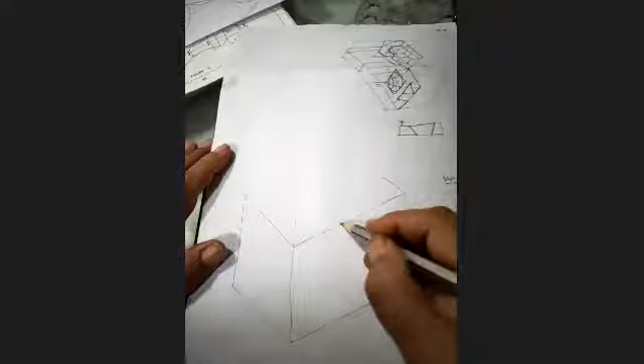Okay, now can you see from here, take 70, make a line. If the box is 30 degrees, right? All isobox are 30 degree. Origin, 30 degree.

This is 120. From here, measure 70, and this is the line. Same line will go up. See, this type we have done.

And here, the center part, the circular block - 20, 20. Circular block is only 20 wide. So just measure 20 and make it here. Is this part clear?

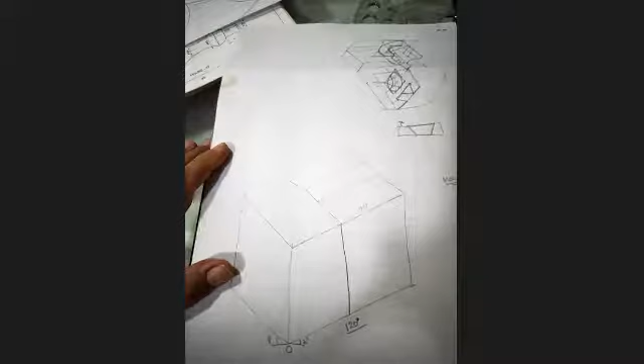And now here miss, should be a... sorry. Okay, miss, nothing, sorry. Okay.

Now this 15 wala part is straight, so I'm making this 15. Then there is a slope over here.

Now the slope you all can see is 45 degree. So what you will do - you will make a 35 line over here, and from here make a 45 degree line, bring this down. This is 90 degree.

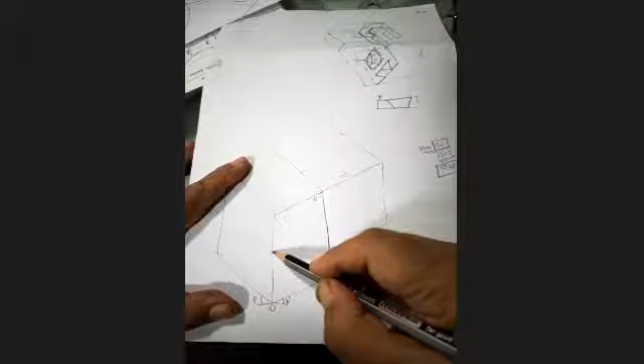So this is 45 degree. So everybody knows that when it is a 45-degree turn, so this is 35, so this also will be 35, right? So just measure 35 here and go like this and bring it down.

Miss, how do we know if it is 45? It is written - you don't have to know, it is written in the figure. Or miss, we can also consider that it's 35 because the circle's midpoint is on 35, like it's on the straight line. So it's not necessary that way, but it is 45-degree.

Okay, now take this line here. Drawing that side triangle is compulsory. Do we need to draw that? Examiner prefers whenever the angle is given, you should draw it.

Okay, and now join this. Take this line here and join this. Is this part clear?

Yes, okay, and this is dark. Now you all can see there is a dotted line over here at the distance of 15. So at the distance of 15, make a line. This line will turn on the slope. This is 15, make a line up till the slope and turn it.

Now this is 60-degree, cut over here. So what you will do - see, I'm making here only. Make a line, this is 70. Make a rectangle, this is 15.

On this mark 20, 20. Make a 30-degree line. So this distance, what you got is X. So from here, we will mark X, and from here also, I will mark X. And here I will mark 30. This is 20, this is 20. Now I'll join. We have done this part in the other figure.

Miss, here can't we directly mark 20, 20 and then mark 30 degrees? No, you cannot. Whenever the angle is given, you have to make it outside. This is 60 degrees, so this line is 30 degrees.

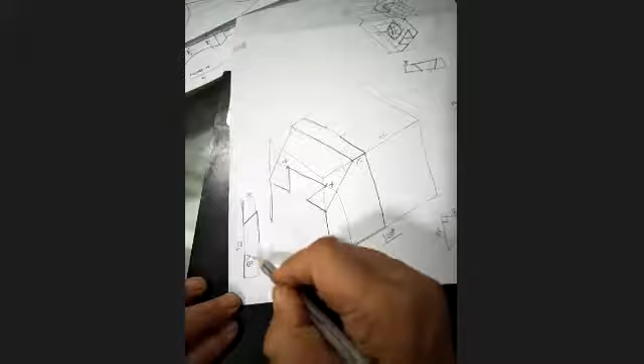So this and this distance is X, which I have marked over here. Now I will take this down, make it dark. Now how much down will it go? You have to make a line inside from here, wherever it meets this line. This line is not a 30-degree line, it is a slope.

Miss, but the line from the 15 centimeter is a 30-degree line, right? No, the right side wala. This is the 30-degree line, then you have to take this 30-degree line. Wherever the vertical line meets, you have to join.

You can see the solution also. Okay.

Is this part clear? Now from here, come down 70. From here, come down 70. This is your rhombus.

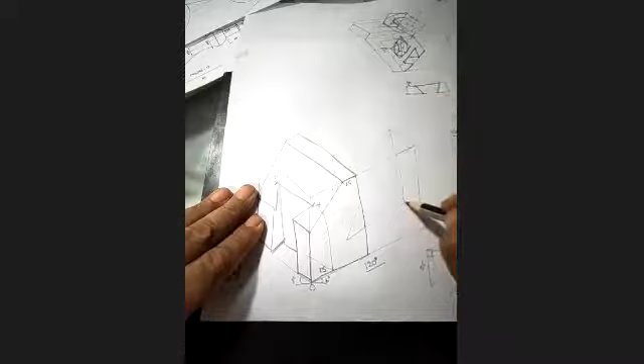Join the longest diagonal. Now you see, and take a midpoint, that is 35. With this center, you will get this part, and with this center, you will get this part. Now you can make this part straight, this part straight. Tangent behind, this center behind by 20, you will get this part. And join.

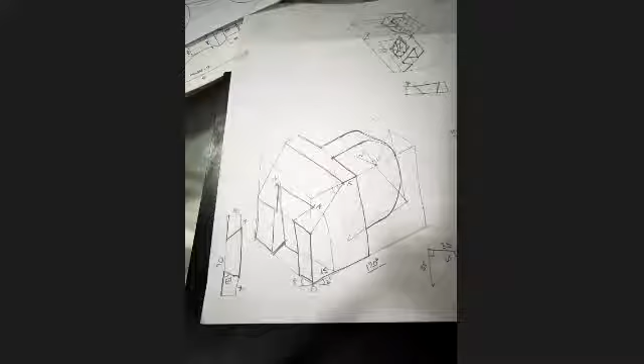Now, will you be able to make a circle inside, or should I teach you that also? Miss, the line which you extended, which is of 20 centimeters, is parallel to the tangent, right? Yeah, this line is the 30-degree line. So the 20 wala line is also a 30-degree line. Yes, this is also a 30-degree line.

Anybody, any doubt, can you show this figure? Inside circle also? Yeah, okay. Inside circle, can you measure 35 here? Make a line. From here, measure 35, make a line. Got the center point?

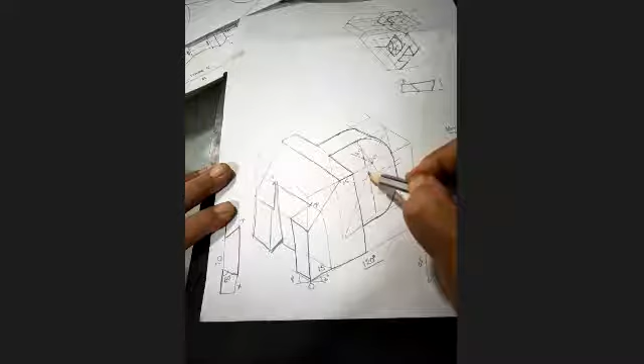Ma'am, that point, will it pass through the diagonal from here? 35, yeah, this point should be on the diagonal only. Mine is a rough figure. And now the radius of the circle is...

20. So 20 up, 20 down. Bring this here, bring this here. The diagonal will be common. Again, from here, this midpoint and this midpoint, you will get it. The circle may not be complete, it can be like this. And from here, you will make like this.

Got it or no? So we don't have to bring the circle outside the line, right? No, see, if this line, if any part means, you don't have to make it here. How much ever is fitting, you have to make that much. And ma'am, we are supposed to take it behind as well, no?

Yeah, if it is possible, yes, you have to take it behind. I'll just see the distance. Distance is 15 and the other radius is 20. Distance is 20, yeah, the distance is 20.

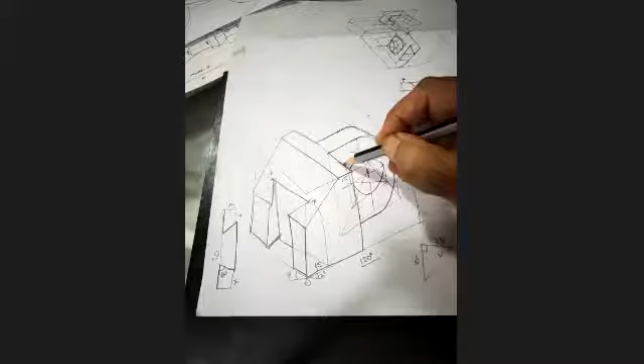But shifting, only the below wala long curve will have to be taken behind. Yes, only the below wala long curve. So this point, which is here, you have to shift this behind by 20. And this radius, from here, this radius, you might get this. Got it?

Miss, can you please explain the arc again? Which arc, this one? Yeah, the one you just did. You know this arc you made with this center, right? Yeah. So you have to shift this center behind by 20, because this is 20. Okay, miss. And the same radius you will make again.

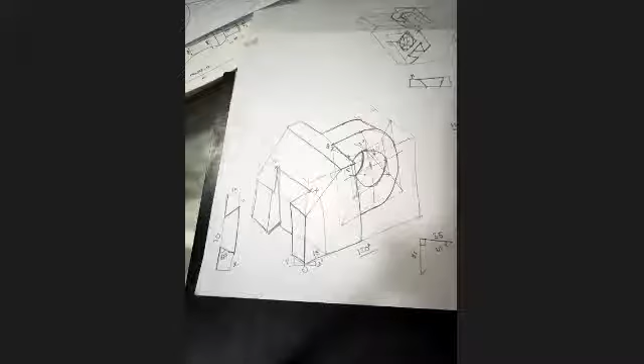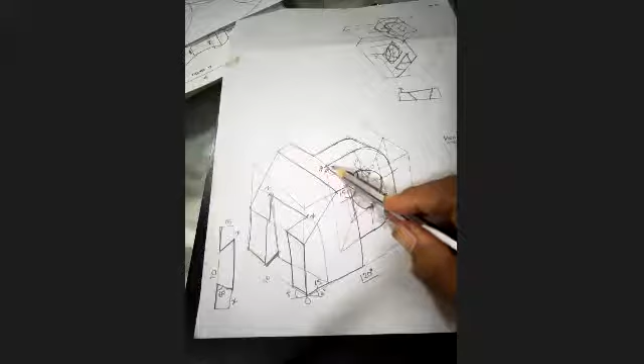Miss, could you repeat the measurements of the box? I'm not able to hear you. Ma'am, could you repeat the measurements of the box? This 35 wala? No, the isometric, the first box I made. Yeah, this is 120, this is 70 this way, and height is 70. And here I gave the shape, and here I made the rhombus of 70 by 70. Got it? Yeah, ma'am, thank you.

Now I have sent you the figure. The second figure is this figure. Now in this, the length is 20 plus 80 plus another 20, again the length is 120. 120. Height is 85 and width is 65. Is this part clear?

Yes, miss. Okay, I'll make the box.

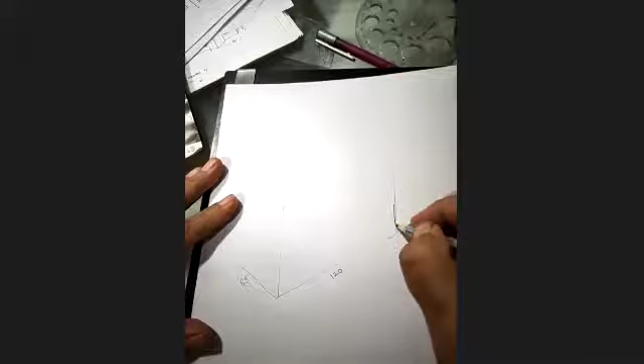So please see, this is 40. Then it is coming 20. Then it is going up 15. And then again it is coming here. So how much it will come here? 20 more. Then take this line up. Here. Is this shape clear?

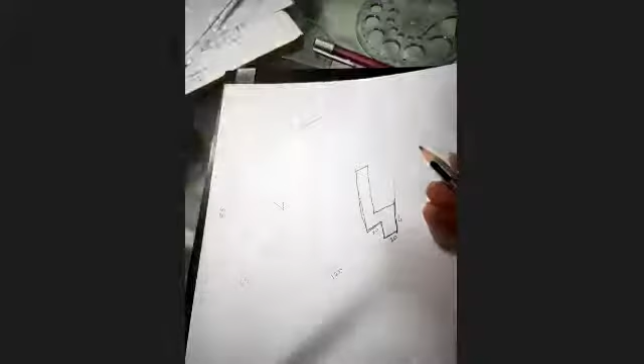Now take it behind. Take it like this. This is the top view. Now top view, you can see it's an L shape. 15 here, and it is coming like this. So I'm making that. 15, come here and join. So behind part, either you take it down and take it back, or you can directly join this. Both solutions are possible. Either you bring this down, take it back, or you can directly join this. Both are possible.

So this part is done. Now this part. Here you can see the platform. The platform is only 40 wide and it is in the behind part. And here is the full line, means this is not in the same surface. It is behind. How much behind it will be? This is 65 and this is 40. So this will be behind by 25. So how we will come to know that?

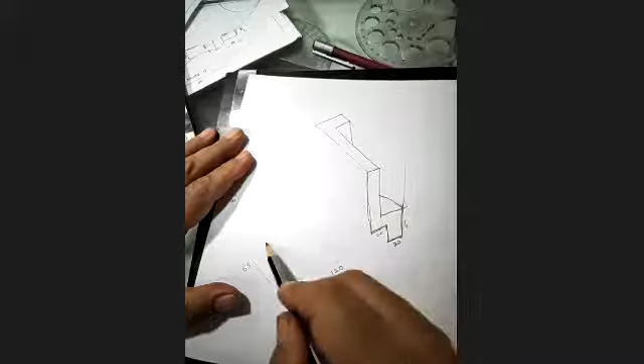Okay. Make this line, measure 25 and bring it here. Bring this line down. See here. This is very important. Bring this line down and bring it here. Go up. The height of the platform is 15. Go up. Take it here and take it here. I'll erase this. I'll explain you once more.

The easy way. Go inside 25. Go up 15. And go here. Bring this line down. Is this clear now? Now this line, bring it here. Measure 40. And bring this here. You will get it. Got it? The upper part. Why 40? Because it is given 40, no? This is 20 radius, so this total will be 40. Okay, miss.

So this is here and this is here. Now this you can make it down. Got this part? This part should touch the ISO box. The common mistake students do: when they bring the line over here, they go here, so the figure does not come. You have to bring this line to the box. If you go from here, it will be 20 less. So you have to bring this line.

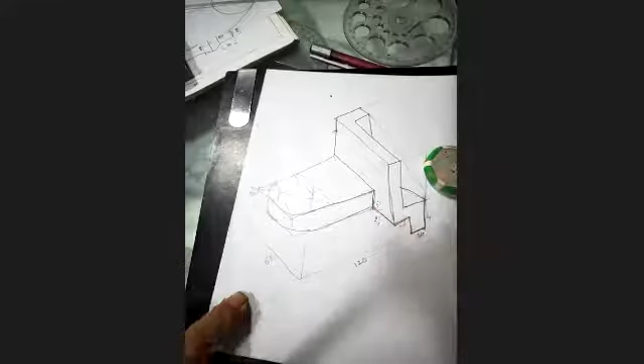Now, this is already 40. Measure 40 and make a rhombus. Longest diagonal. Join this. With this center, you can make this. And with this center, you can make this. Tangent down. This down by 15 to get this curve. Now you can make this dark. Here, this line will also go in.

Now I have to insert the slope. Now slope is in the center. Leave 15 from here. Leave 15 from here and make this line. How much is this line? This is 50. It is given in the figure. And how much is this going up? This is 20. How will you come to know? Here it is given 15 and 35. So this is 20. And this is 50. From here to there is 50.

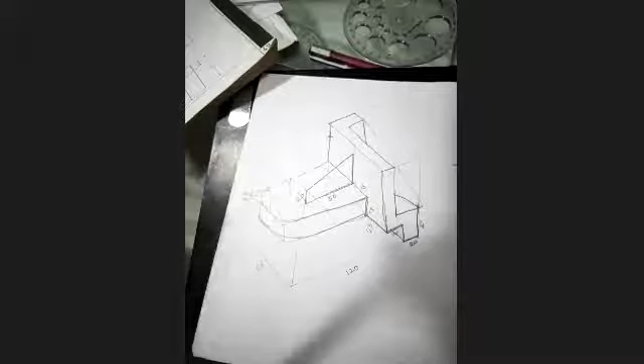Now bring this line up, but measure 10 down. This is dark, only 10 less, and join this. So you will get this shape. Got the shape? Yes, miss. 15, 50, and this 20. Now here you can take 10, 10, 10. Same shape and join. Now you can make this part dark and you can make behind part dark. This need not be dark. Done. Is this clear?

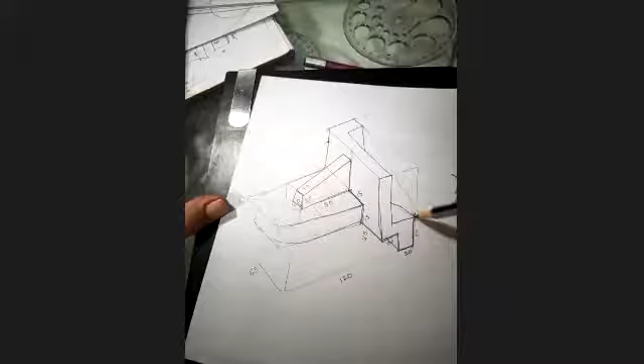Ma'am, where you've written 20, it is 20 up, right? Yeah, this is 20 up. And this is 10. This way it is 10. Ma'am, on the right side, it can be a slope also, right? Yeah, right. Two solutions are possible. Either you can make this and this, or you can just directly join this. Okay.

Miss, did you erase the first figure? No. Can you please show it for a sec? Yeah, I'll show you. Here. Got it? Yes. One sec. Yeah.

Yes, miss. Thank you. Solutions also I have sent, so you will not have any difficulty. This is just explaining how to understand the figure. Yeah, miss. Now the third figure.

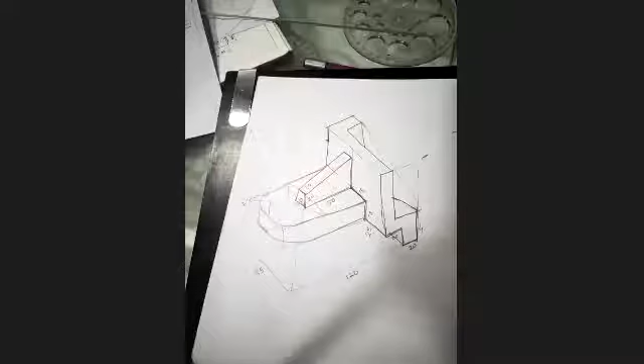Third figure is what is the length, width, height? I have given you the scale 2:1. Can everybody see 2:1 over there? Yes, miss. So let me see if I have got a printout of that figure, so I can explain fast.

I don't have a printout of that figure, but I will explain you. Yes, maybe you can screen share. No, that too I have on my laptop. Tell me the length, width, and height of that figure. Double it and then tell me.

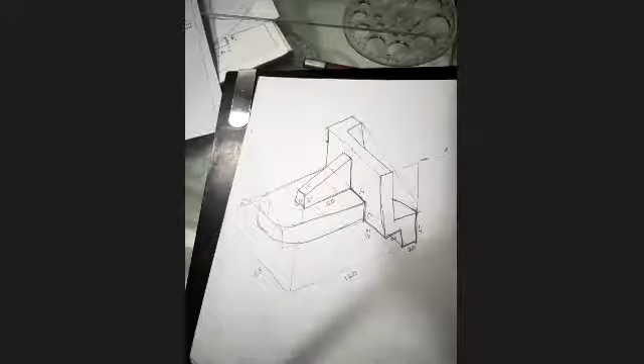And the height is 52. Height is? 52. So just see, I'll make it here only. Okay. Now here is the straight part. There is a rhombus over here. How much is left? What is the radius of the rhombus? Sorry, the circle.

11, 22. So we will take 22 means 44. This gap is 44. You will make a rhombus 22 down, 22 up. This line is here. This line is here. Longest diagonal. Join this with this center. You will be able to draw this. And with this center, you will be able to draw this.

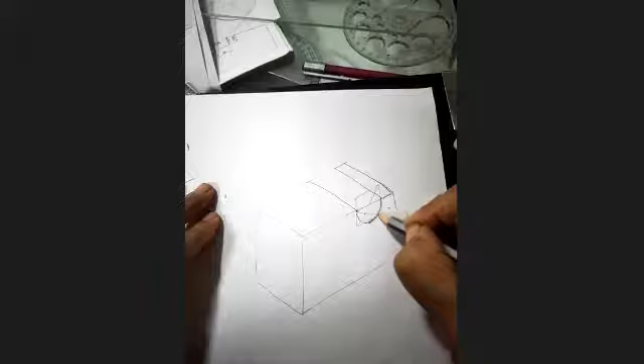Shift this center behind by, what is the width over here? What will be this width? 52. So shift this center behind by 52 and this radius, make it over here. Is this part clear? Here, this part is straight. Come down. Complete this part.

Now take it here lightly. What is the thickness of this center part over here? Tell me the original measurement. 22, miss, maybe. This is 22? 44. So bring it here, come down. Bring it here and come down. So first I will complete this. Take this inside, go like this. This part is completed.

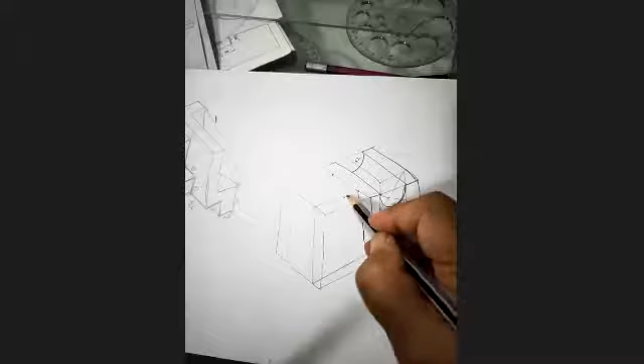Now there is certain part straight over here. From here the measurement is given, some 34, something like that. 17 or 34. And some height is given over here. What is that? 9. Miss, 9, right? Yes, 9 ka double will be 18. And what is the straight part over here?

Think. I'm going slow. Nobody is replying. Miss, is it 17 or is it 63 minus 34 plus 17? Yes. Wait, let me open the figure. I will see myself. What, miss? Miss, is it 16? Yeah. Wait, 1 minute. One minute.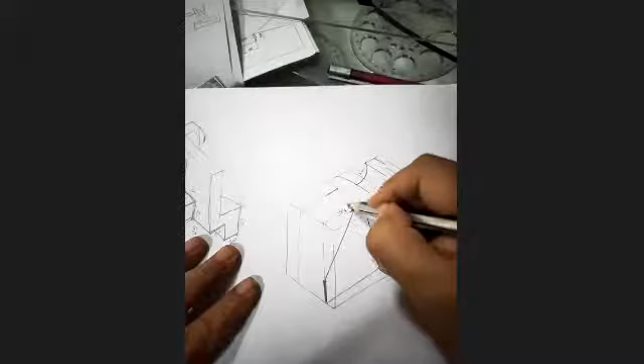So from here it is 17. From here it is 17, so measure 34. Okay, and height is 9, so measure 18 and join. Then go here, go this way lightly and join. Is this part clear?

Yes. Now there is a center part, that is 10. 10 ka double is 20. So from here mark 20. 10 this side, 10 this side. Can you complete these rectangles? And what is the depth of that slot? It is 12. So from here measure 24. Go up on the slope and turn. And now again measure 20 or just make the parallel lines.

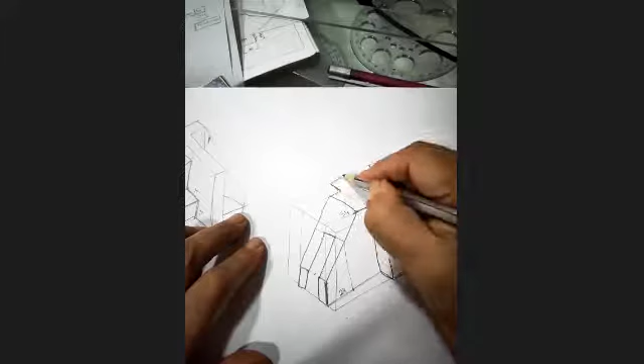Is that clear? Yes, miss. 63, you will write 63. Below the figure, you will write scale 2:1. In the solution also, I have given you the same thing. Okay. So this way we have finished sheet number 17.

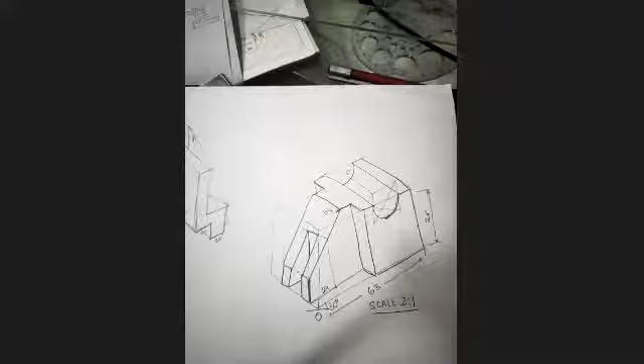You all can start sheet number 17. Not now, means after the class is over, anytime. Finish this in 1 week's time. Oblique, everybody is done with oblique or not? Yes, miss. Okay, oblique is done. Miss, could you explain the last figure of oblique views? Last figure of oblique view. Okay.

Let me open it. Yeah, I got it.

Last figure of oblique view. First you make 90. Height is 100. And this way also it is 100. 45-degree lines. Is this much clear?

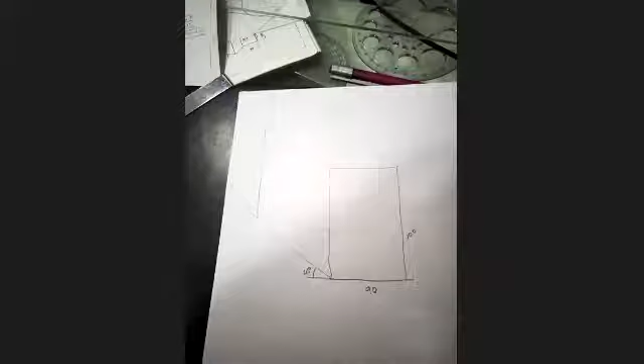Who has asked? Please reply. Yes, ma'am. I have to really take the attendance because we have to mark. Dev Sethia, will you reply now? No, he is not replying. I have to take the attendance.

Miss, what is HSV? HSV, left hand side view, na? LHSV. Yeah, miss, because it's not given L. Where? In the third figure's question. Oh, it must have been left out in the print. LHSV. It is left hand side view. Okay, miss.

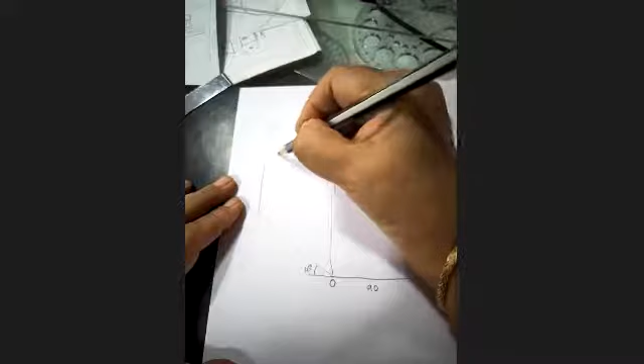Okay. Now what you will do, first we will give the shape of the left hand side view over here. Measure 12. Come down 40. Again come 12 and join the slope. Is this much clear? Yes, ma'am. Okay. Now go full this side, same way. Come down 40, measure 12 and join this. This is the shape we got.

Okay, these lines are light. I have made it dark for you all to see. I will erase them. Now from here, measure 20. How much will you measure? 20. Bring it here on the slope. This line is dark. And this part is dark now. This is also dark. Bring this line here. Now you can see the center part is 66.

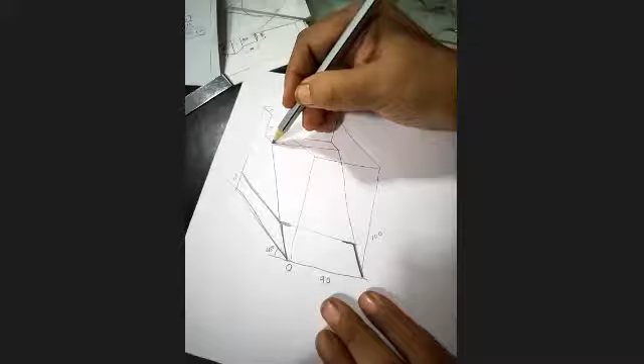So either you take midpoint and mark 66, or 90 minus 66 is 24. You can mark 12 over here. You can mark 12 over here. And this is dark. Is this much clear? Yes, ma'am. Now here also, parallel lines. This is here. This is here. Go behind. Go behind. You can make this part dark. Make this part dark. Here also. Now is this part clear now?

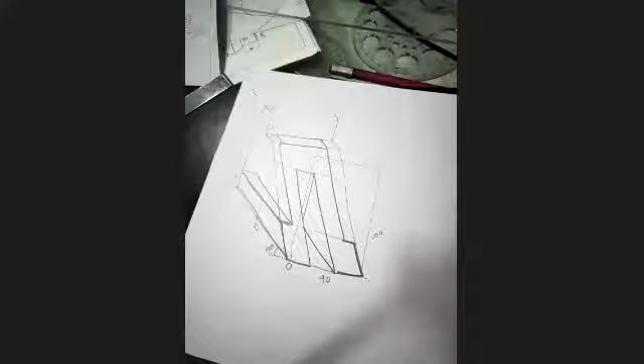Yes, ma'am. Now the slot. The depth of the slot is 50. So at 50, make a light line up till the slope and come over here. Again, take a midpoint, mark 10 this side, 10 this side. Here also midpoint, 10 this side, 10 this side, join. Make this dark, make this dark. Come down, and this is 45-degree line. Is this much clear now? Yes, ma'am. And here, this is 45-degree line behind.

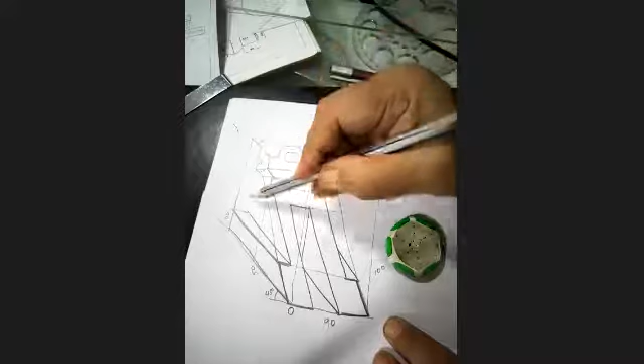Okay. Now here, 20 up, because other 20 is the circle. And light line, take a midpoint, make 20 circle. Make another circle. Now we have to shift everything behind by 12 because this thickness is 12. So when you take this 12 and bring it here, this part will get complete. 12, complete this. 12, complete this. Tangent, 12 behind. This center behind by 12 with radius 20. Make this part, and with radius 10, make this part. Is this clear now? Yes, ma'am.

From where do we have to take radius? See, this is the only thing here. And when you are shifting 12 behind, from here only radius 10. Okay, miss. See, any circle, if I'm shifting this point behind, and suppose this is radius 20, so from here also I'll make 20. Got it? Yes, miss. Also, any more doubts in sheet number 11 and 17?

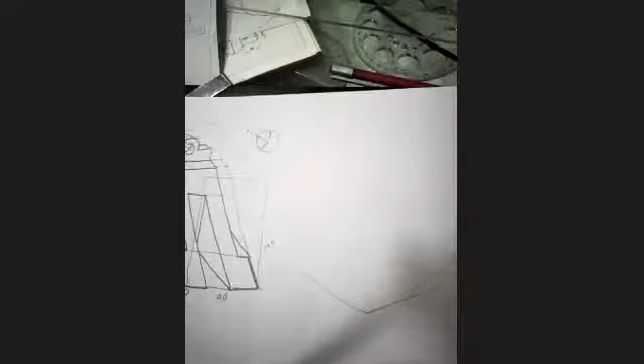Okay. Now, Kunj, your doubt in figure number 1, sheet number 16. Miss, I didn't tell anything. Who asked? Somebody asked. No, wait, let me see who asked. Yeah, Kunj, only you asked. No, miss, I didn't tell. Figure number 1, sheet number 16. Yeah, Miss, Kunj told us. You only asked.

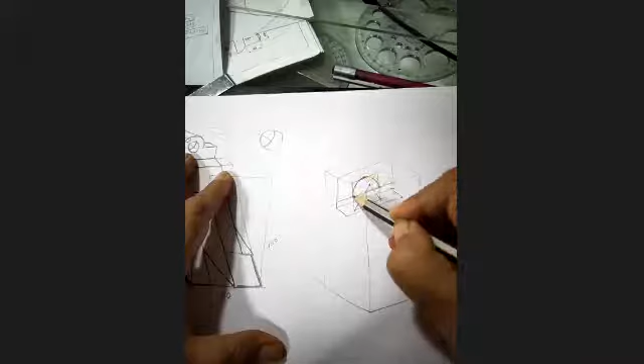This I said, this is 50. Wait. Here it is 15 and this is 30 down. And then here it is 10. So here at the height of 5 mm, you have to make a line. Take a midpoint, take 15 up, 15 down, 15 up, 15 down. So this will come like this. And from this center, you will make like this. So this part is dark. This gap is 5 mm.

And now this is 30. So you have to go down 20 to complete the rhombus. This is the longest diagonal. Again, take a midpoint. When you are making this circle, it will come only up till here. And this part is dark. And with this center, you have to make this. And it will come only up till here. And this part is a straight line.

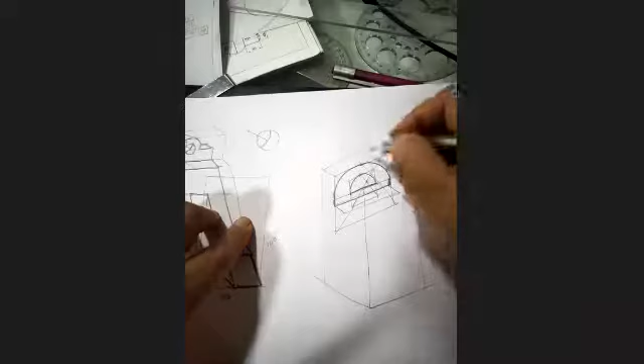You did not ask me this doubt now in the beginning of the class? No, ma'am, actually, I didn't tell. Huh? I didn't tell you. I think you said. So I told you also, first listen, stop.

Yes, Kunj, you were only there. I didn't tell, now you are saying. Okay.

This center you have to shift behind by 15 to get this part. And this center you have to shift behind by 15 to get this part. And the lower part everybody knows. Okay.

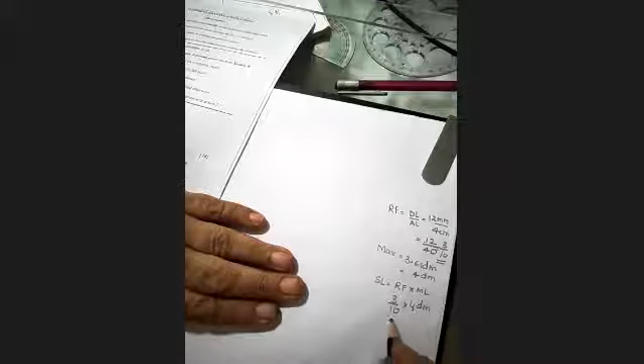Maximum length given is 3.61 decimeters, which will be taken as 4 decimeters, and scale length will be RF into maximum length, which is 3 upon 10 into 4 decimeters. But our calculation is always in centimeters. So 3 upon 10 into 4 into 10 centimeters. So it comes as 12 centimeters. Now everybody knows how to make a diagonal scale. Yes. So everybody will do this question number 1, means you have work now. You can start 2019 board paper as well. So this is that. Now the second question.

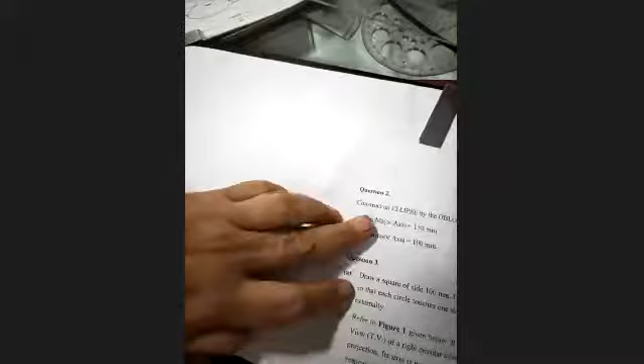Construct an ellipse by oblong method. Anybody, any doubt in this? Construct an ellipse by oblong method. Ma'am, we know this. You know this. Question number 3A. Draw the square of side 100. Construct 4 equal circles inside the square, touching one side of the square. So what you will do? You all be knowing this also. Make a square.

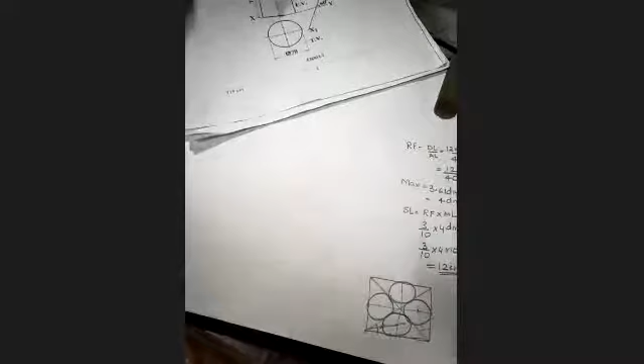Both the diagonals, vertical line, horizontal line, bisect this angle. Here you will get a center, and now you remember, you all have done. We can bisect any one of the angles. Yeah, any one of the angle, any one side. You can bisect this also. Can you please shift your screen a bit to the right side? This side. Is this clear? Yes. Okay.

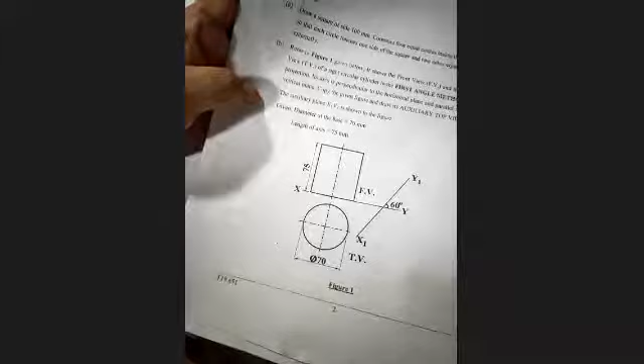Question number 3B, you will not do now because I have not done auxiliary views. Next Tuesday is the ICSE cell meeting. We will come to know the portion more properly. Now I will teach you this oblique view. I will send you the picture also, but see this oblique view. Again, it has the same concept what we did just now.

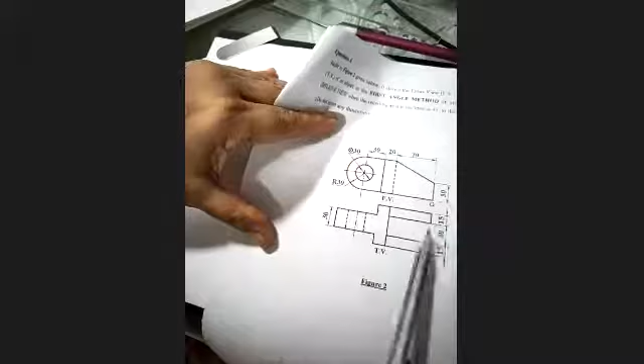Can you see the oblique view is divided into 2 parts. One is circular block and one is slopy block. Now from the top view, we can understand the circular block is only 30 wide. And slopy block, we can understand there are 2 of them, one in front, one behind. The length of the box is 30 plus 30, 60 plus 20, 80 plus 70, 150. Height of the box will be 60 and the width of the box will be 60. So here it is, please see.

This is 150, 45-degree line.

It's not visible. Can you take your camera off the lights? Okay. Actually, I was sitting, so I could not see. Now, is it visible? Yes.

This is 45 degrees. Now, what we will do, see here. Can you see 70 and 20? So mark 70 and mark 20. And here below it is 30. It is nearly the same concept. 30. Make it dark, make this dark, and this.

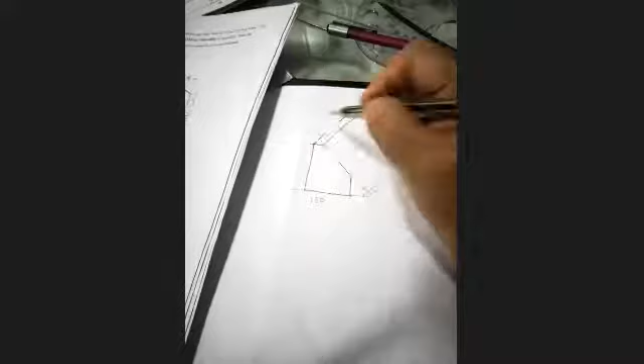Bring it here. Now here, corresponding to this 20, there is a full line, and here it is a broken line. So this I am making it full. This I will make a light line, and here I'll make 15 dark. Take this side, take this side. Exactly the same concept what we did now. And bring this line here, join this dark. 1 second.

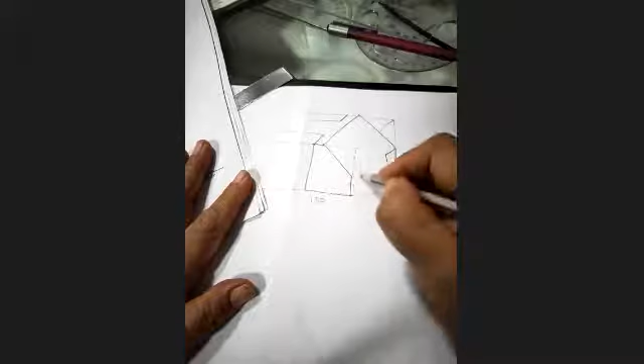Okay. Now what you will do? These slopes are 15, 15. So again, we'll measure 15, 15. Complete this rectangle. Measure 15 here. Draw this. This line will come vertically down.

This is the replica of this dotted line. This dotted line is actually this line which is going behind, and then this is the straight line with the help of a T-scale. Got this part or no? Yes. Okay. Now it is simple.

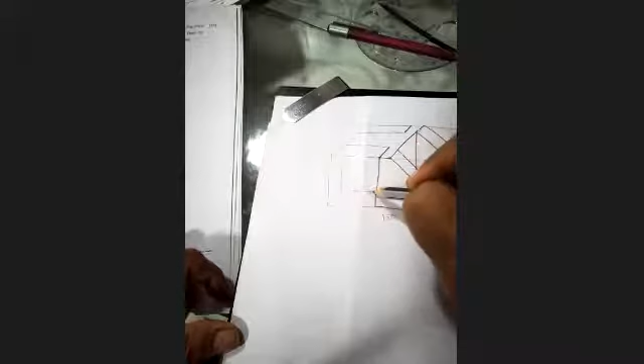Now bring this 60 down and come here. From here, you can measure 30, come 30 here. Just make a semicircle of 30 direct because it is an oblique. Tangent behind with 45 degrees set square. Center behind by 30 and you will get this part.

This is done. A circle over here and you will not get the depth because this is also diameter 30 and shift is also 30. Is that clear? This shift is 30. Done. The oblique view is done.

Okay. Now, question number 5. Question number 5 is template. And you all have done this template in the class last year. I will tell you which template this is from your textbook. Actually, this is the half.

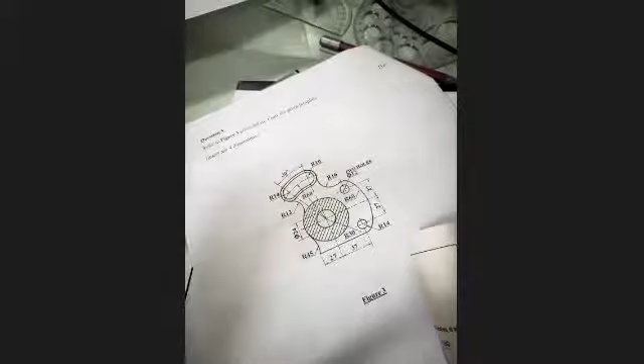The lower part is not there. Will you try on your own or you want me to explain this also? Are you thorough in the template? We can try it on your own. If we get stuck... Okay, I will have one doubt session. You can ask all these doubts if you are not getting it. This is the same template you all already have done. So try this on your own.

The only thing I will say over here, when you are making this 14, just make the quarter circle and then make a straight line, which is 37 and 27. And this 45 will be 30 plus 45. And from this point, direct 45. So you will get this curve. Rest, everything is the same.

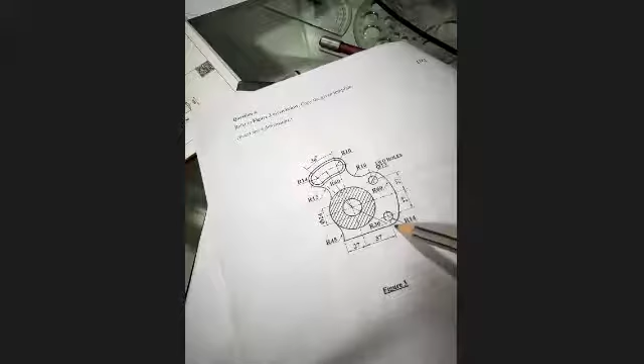Is that clear? When you are making this 14 circle, make a quarter circle and make a straight line. This is the curve touching these 14 circles. So 60 minus 14 and 60 minus 14, you will get the same. So this is done. Question number 6 is sections of solids, which I will do with you all in the class. Question number 7 is copy ISO.

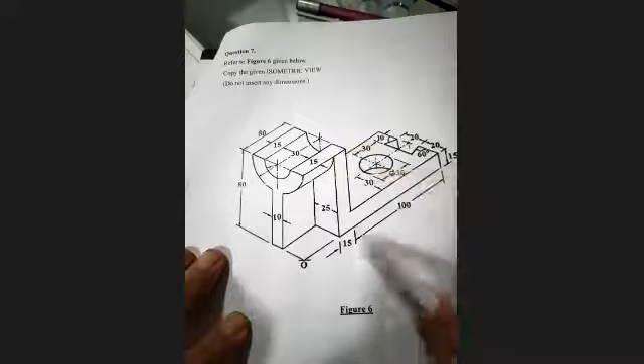Question number 7 is copy ISO. See how simple it is. It is 26 marks. The length will be 100 and this 50 because this 15 is coming inside this. So length will be 150. So same way, 150. This way it is 60 and height is 80.

Box is made. Now here, mark 15, 15. From here, mark 50. Come down. This is 50. Come down. This is 15. Come here. This measure 15. This part is done.

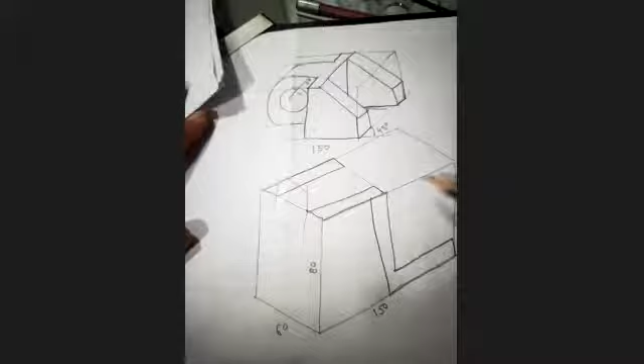L shape. Here make a rhombus, 15 up, 15 down, 15 up, 15 down, complete a rhombus. Take this line behind, complete these rectangles. I think now copy ISO is easy for you all. Still not? After doing ortho to ISO and all.

Longest diagonal, join this with this center, you will get this part, and with this center, you will get this part. Shift this center behind by 50. And the same radius, you will get this part. From here, 30 down.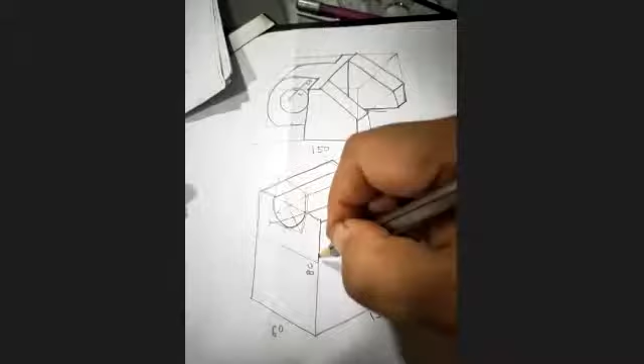Next time, I will not allow the recording because the students are leaving the class because they know they will get the recording. 4 students have left the class without informing. Now there are 30 students. 3 students have left the class. Prasham Gosar left now. So you only are teaching the lesson. The students only teach the lesson, not to allow anything.

Again, this is the longest diagonal. Join this. With this center, you will get this part. And with this center, you will get this part.

Now we want this behind, so make a tangent behind. But this is 15 already, so the remaining part is 35. So you have to shift this center behind by 35, and with the same radius, when you make here, you will get it.

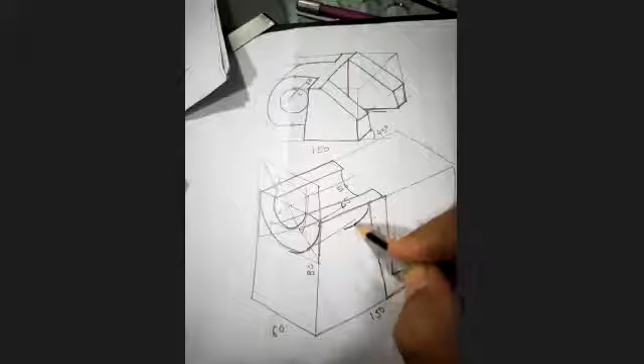This is done. Now you make a straight line here. Go behind, go behind.

Got this part or no? See, this is the figure.

Now this side, the figure is divided into 20, 20, 20 parts, and the thickness of this slot is 10. So you will go behind 60. The proportion is not proper, so you will make 20, 20, and make the 10 line.

Again, we have to make it outside. Again, you will make this 60, this 10. Mark 20, 20. Make 30-degree line, 30-degree line.

This is dark, this is dark, this is dark. This distance is X, so we will mark X over here, we will mark X over here, and this is the figure. This will come down.

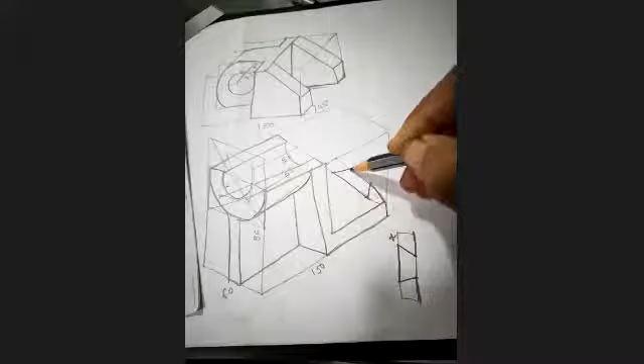I think everybody will be able to make a circle. This is a plain circle. I'm not explaining the circle part. Is this much clear?

Yes, yes, yeah. So today I have done with you sheet number 17, 2019 board paper, and doubt solving of oblique, and 1 figure of ISO.

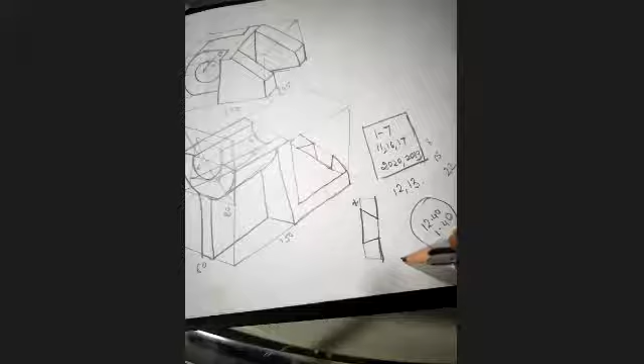Yes, Sachi Mehta. Yes, miss. Were you able to follow whatever I taught today? Yeah.

Dev Sethia. Why doesn't Dev Sethia speak? Is he like this in all the classes? Can anybody tell me? Yes. Okay.

Ma'am, I had a question in the assessment. Yes, ask. So we had to make the equilateral triangle into a right angle triangle of half area. Simple. Equilateral triangle, half area, right angle.

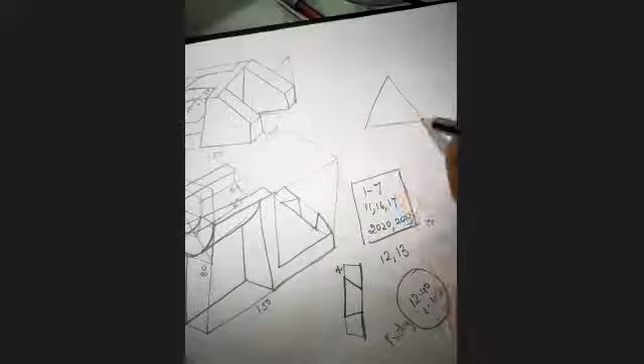You could have just made a line and made this part dark. Okay, this was one method. Other method was take a height, bisect it, and you can make this.

Third was take a height. This is the equilateral triangle. Just take the same height, and so many solutions were there.

I had given the simplest equilateral triangle to half area. Then also many students have not done it. They have just made a triangle and left it like that. They have not made the half triangle dark.

Regarding question number 1, pentagon to square, everyone has got it right because I had given you in the group, please do try pentagon to square. So everyone has got that right.